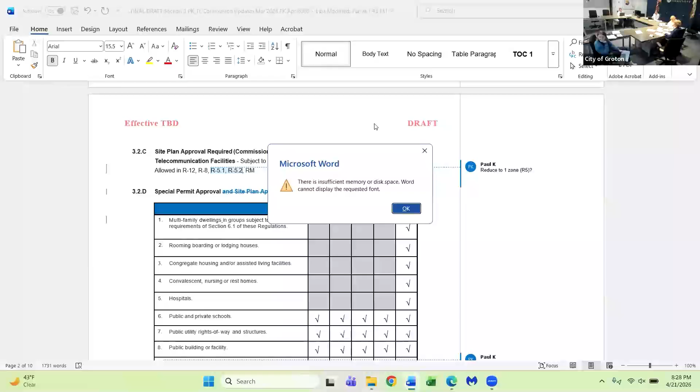Other ones. Yeah, see. All right, so.

This is section 3. This is where we left it after the last meeting. One of the questions we had, Ron, is do we need both R5.1 and R5.2? Both. You look at them, there's no difference in use or dimensional standards between the two. The idea was that we can just have R5 and be done with it. So now there's that. Seems to make sense.

Can we scroll through? There's a difference between R5.1 and R5.2 for vocational training facilities, physical and developmental disability, subject to requirements of section 6.9 of these regulations. That's in 5.2, but not 5.1.

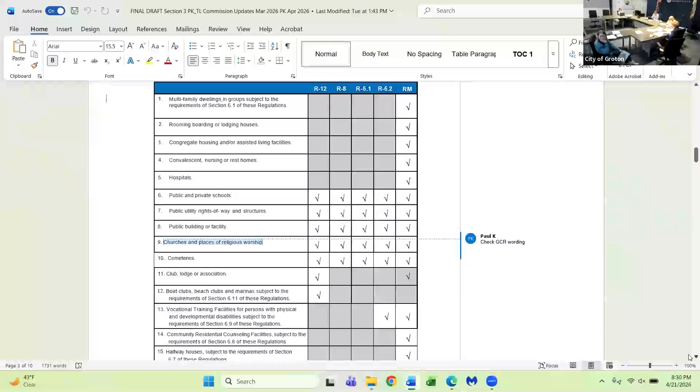Is there any particular reason? Because the dimensional standards are the same, all of them. So you have to look at the map to see where 5.1 and 5.2 are.

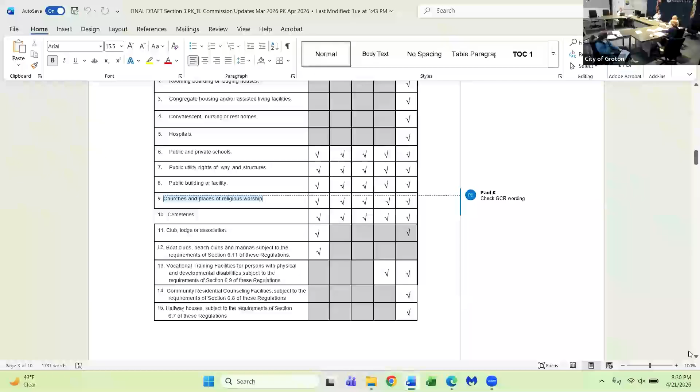We'll go back to it at the next meeting. All right, let's just move on to two. Sure, all right. Well, yeah, you're watching me.

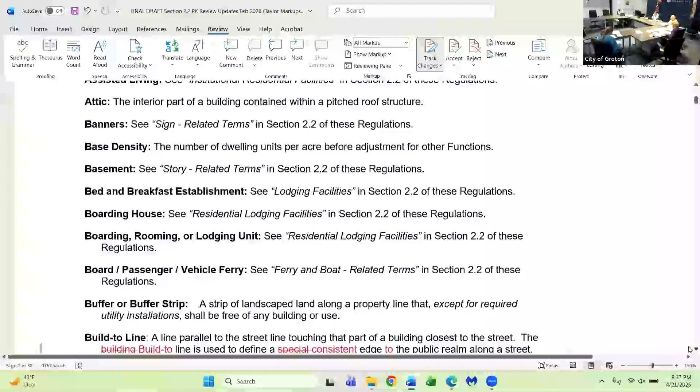Open it. Okay, this had to do with the build-to line, and then somehow in here we got the building line, Brendan, the build-to line, to define a consistent edge to the public realm. This is just wording stuff, but...

Does the revised wording make more sense than the existing? Yes. Yeah, it's fair. All right. I'm sorry, it's good, yeah, it seemed to make more sense to me.

The next one is principal versus accessory, and where we had typically stated these as principal versus accessory related terms, the wording was added just to be consistent with the way the rest of these are cited.

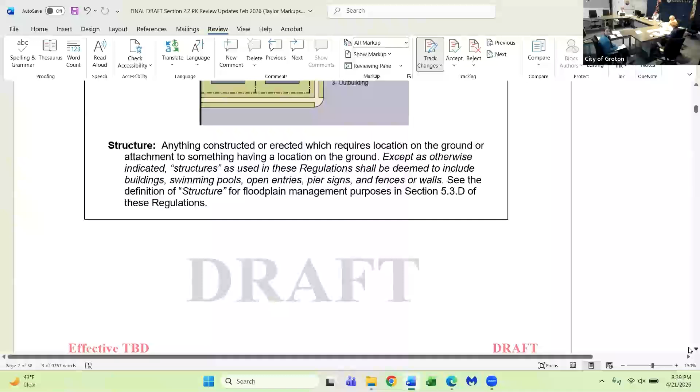Anybody has anything, or scrolling through, just tell me what word you want. So I added a commercial message because CR proposed adding some definitions that pertain to murals and artwork around the city. So definitions like commercial message, and I believe there's another one I added in for murals. Just as a written statement, I should have brought to this meeting, but that's in there just for your review.

Okay, so this is, we don't necessarily have a use, right, for a commercial message, but we have a definition if that ever comes up. Is that... any concerns with it?

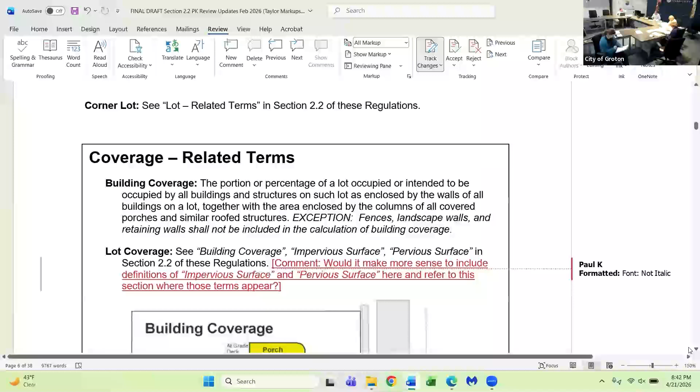Referring to this section, I don't know if... are you saying, does it exist here now? They do exist, but they're in a different place, a different location in here. Right, and what I'm suggesting, the question I'm asking, is would it make sense to put those definitions here instead of somewhere else, so that when you get to those, you could just say refer to...

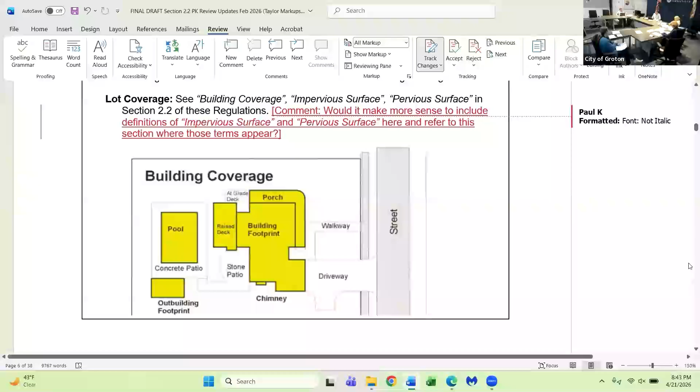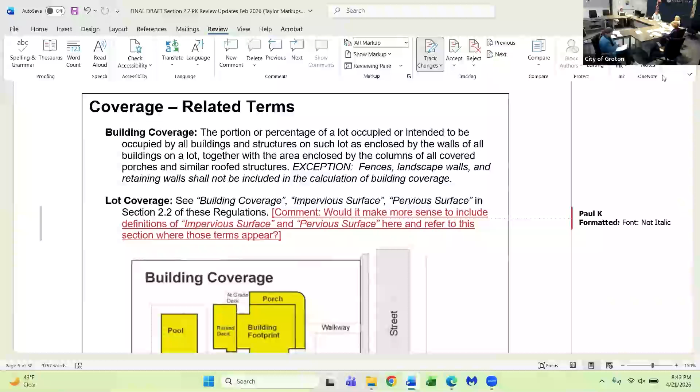Refer to coverage related terms. So does that make sense? Yeah, yeah, sure. So I'm not gonna mess with that here, I'll just make a note of it. Thank you.

So that'll be, the two of them will be in a little box. Yeah, they'll be in that box. Yeah, and then when we get down to them, we'll just refer to the box.

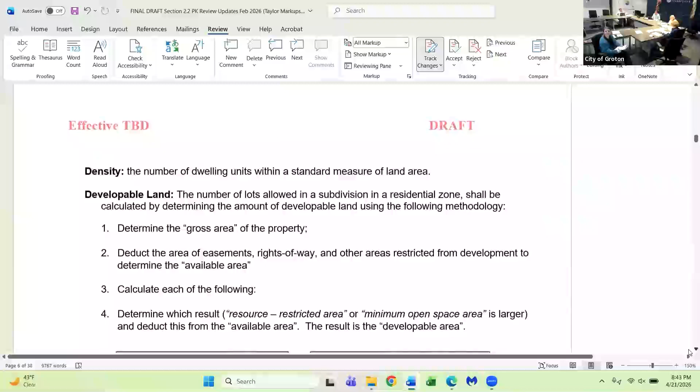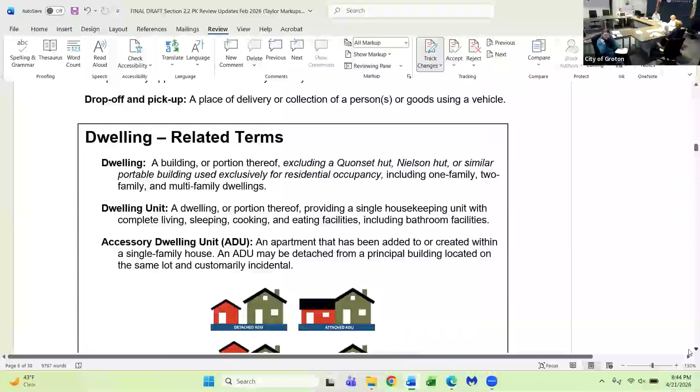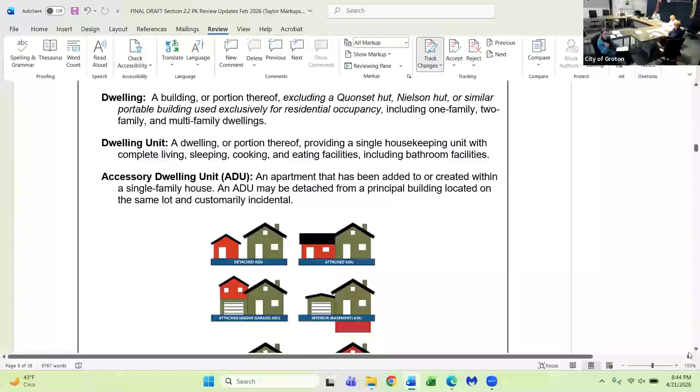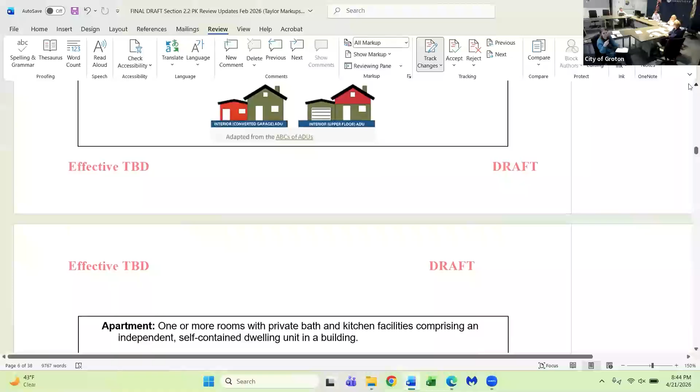So I was told by zoning that the ADU picture diagram thing, half of those don't actually meet the zoning requirements. So they said that could be potentially problematic for developers to refer to that, because there's like the basement and then there's the above attached over the garage. So Sierra and I were talking about maybe revising the picture or just eliminating it as a whole.

Are you saying that the pictures don't conform, or the definition? If the pictures don't conform, they're misleading to developers for when they go and look at these zoning regulations and see what they can do and not do. So they think they're not consistent with the description. Yeah.

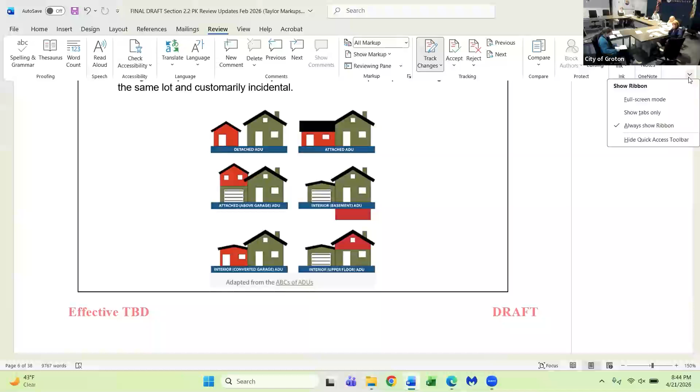Do you know which ones are wrong? The one with the above garage, the one with the basement, for sure. And then...

I also have another copy of this marked up where it has crosses on it, so bear with me. I believe that was the upper floor ADU. I'll have to double check my markups on that one, but it was that picture that they were concerned about.

So do those conditions not exist, or are they just depicted incorrectly? So it wouldn't... so this would just be depicted incorrectly in accordance with these zoning regulations. So yeah, where in the zoning regulations are they, where's the conflict?

So you can't have a basement ADU unless you have, I believe it's an egress walkout, but that's all building code. And then some of our height requirements currently don't allow for the attached above-garage ADU unless it meets the height requirements. But going over the zoning regulations, they mentioned to me that this could be misleading because you can't do three out of the six of these.

So they're saying you can't do... so this one is a code violation. Yeah, this one would be okay as long as it was within a 35-foot height limit. Correct. And the same with this one. So the ones on top, that's what it was.

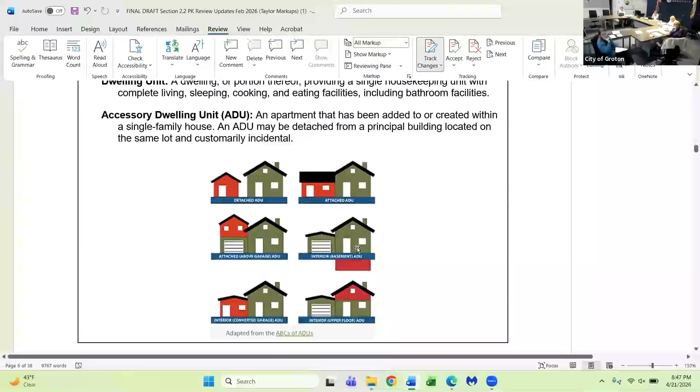So we can fix this one and this one. Yeah, right, yeah, but not this one. Yeah, okay, yeah, definitely with that one, because you see the ADUs underground. So I'm gonna... yeah, well, there's a picture, so. Yeah.

So are you talking about changing the written definition so the picture matches? No, the picture so it matches the definitions. All right, so they gotta go.

Well, it's up to you whether we can fix it or we can eliminate it. So you mean eliminate all the pictures? Or can we pick it apart? Well, I mean, it's all one picture.

I think Sierra said that there was a way for her to kind of fix it. Yeah, if Sierra can fix the picture, that's fine. We should take out anything that's gonna violate the building code.

But the problem with the other two is we have to change our definition of party. I added a party wall definition, and I also added a two-family attached definition for you guys to review. So those definitions would fix the other two problems here? Yes. Okay, cool.

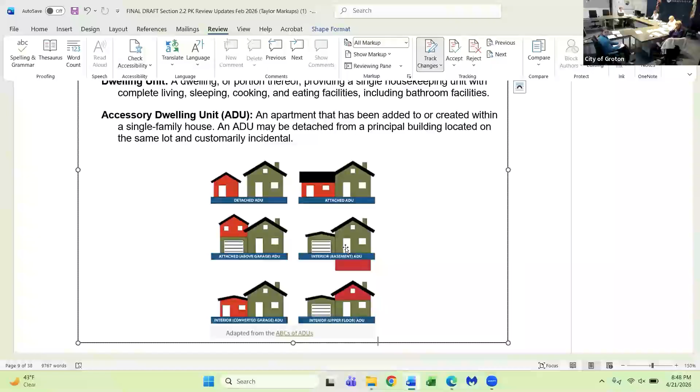All right, I say that's fine if Sierra can take out that one that's unacceptable. That's the way to go, but that's beyond my capability with the tool. Yeah, just spraying white on them. That's right, exactly. A little sticky note over it.

Yeah, it doesn't belong there. But also, okay, so remove the 'but.' We'll accept that. All right.

And that's my proposed language for the two-family. Okay, so this is the two-family, this is your definition you added? Yep, and this was taken from the same book of definitions where they get all these definitions, and the party wall definition. Okay, so we will add that.

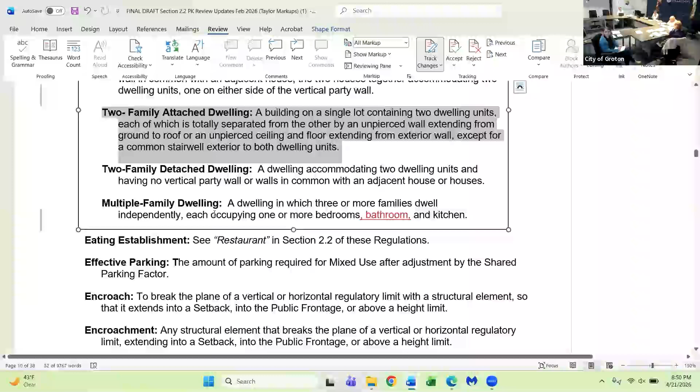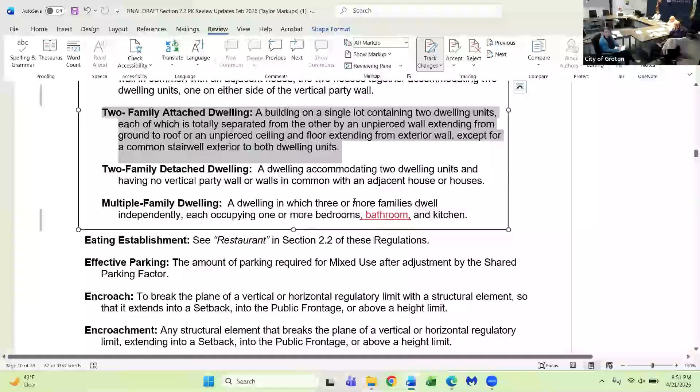Okay, so the multiple family dwelling: three or more families dwelling, each occupying one or more bedrooms, bathroom and kitchen. I added the word bathroom. Right, because it's more than bedrooms and a kitchen. We don't have common bathrooms anymore.

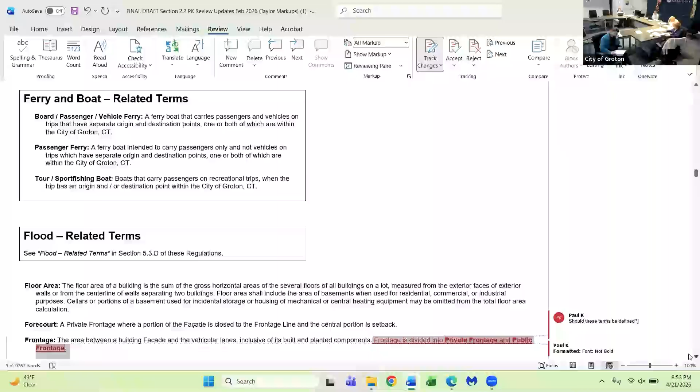Right, it's got very important main terms, it's got flood, it's got... and this frontage.

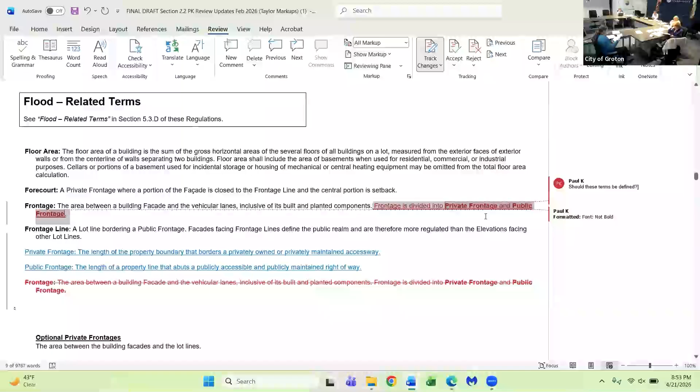We can move it up. Well, there was a reason. Well, I mean, it's... Yeah, I mean, private frontage and public frontage should be... and then you can get rid of frontages to define it.

And the frontage had been down later and then it got moved up. Moved along, not exactly.

Select... the red paragraph at the bottom can go away because that's right up above.

Right, yeah, we took out... and then just use frontage, it goes. Yeah, frontage line has to move. And these come at the... below the others.

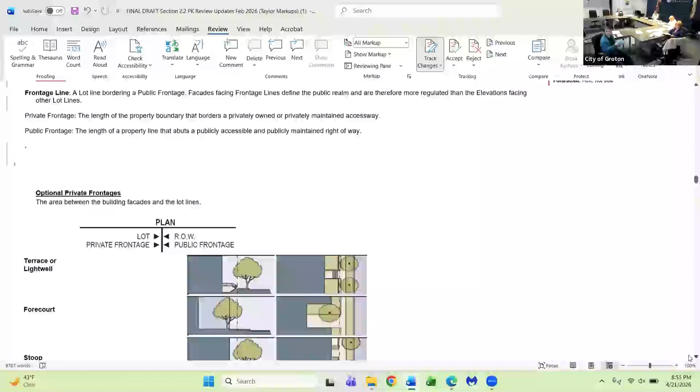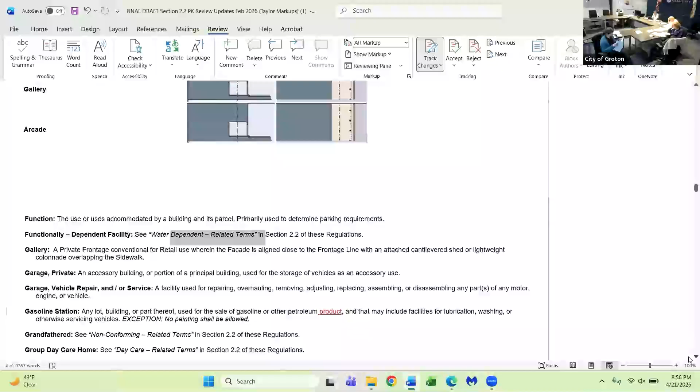Yes, on each station. So I just made those changes to kind of be more aligned. I added in gasoline stations, I added other petroleum product, I added the word product.

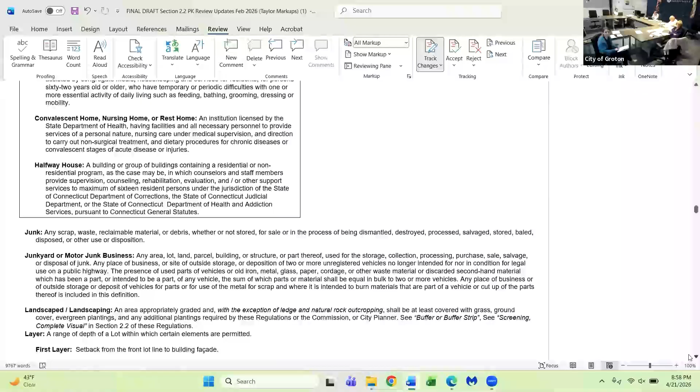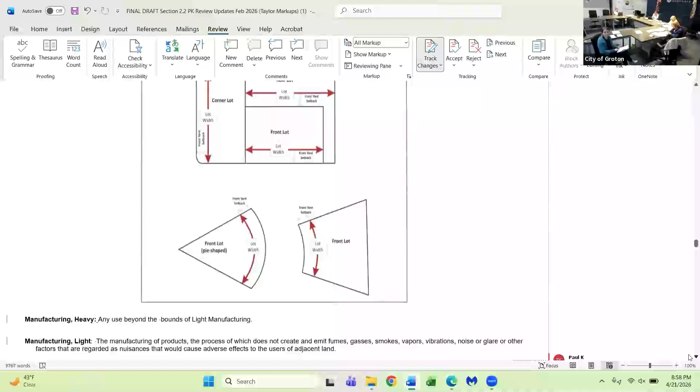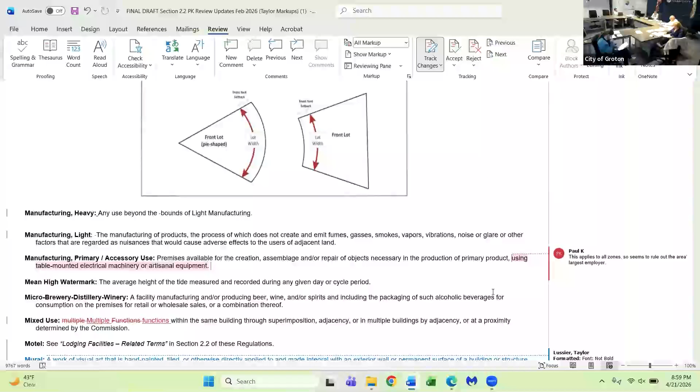So, seemed to me it, when it -- I don't see the need for that phrase anyway. Yeah, well, kind of been kind of exacting. I think we were...

At one point we were struggling with: what if somebody wanted to do some small scale manufacturing in commercial, that type of thing. And that sounds like there. Taylor, does the big book of definitions have something for manufacturing?

Big book of definitions here is now -- oh, it says no. What's that? Or it says, no, I think it's really... I think what you had to begin with is just fine. So we should take out the 'using.' Yeah, okay, yeah.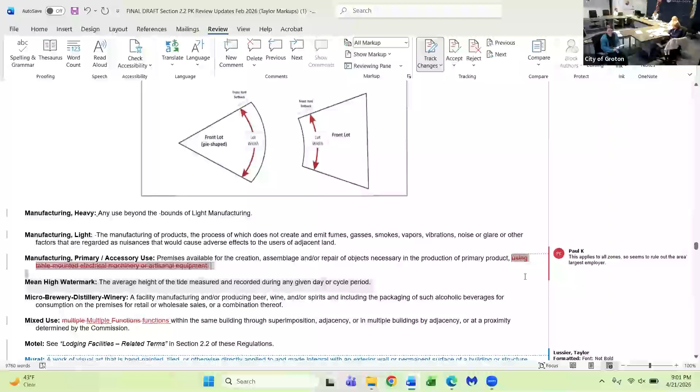Remind all of them and fix it. If we don't get anything tonight regarding what we're going to accept, when we change the things that we don't do, at the end we can just accept them all.

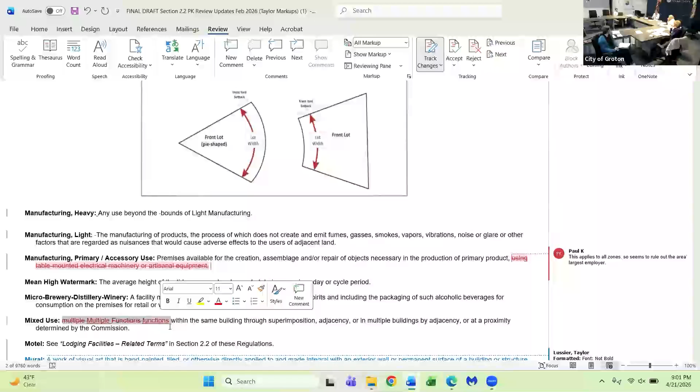I'm afraid, I don't want, if I try to keep a running list, that's my concern. I just assume if you can bear with me. I'm not sure how much further we're on now. I don't have any question about the time, I'm just trying to make it easier. I just assume if you don't mind watching these.

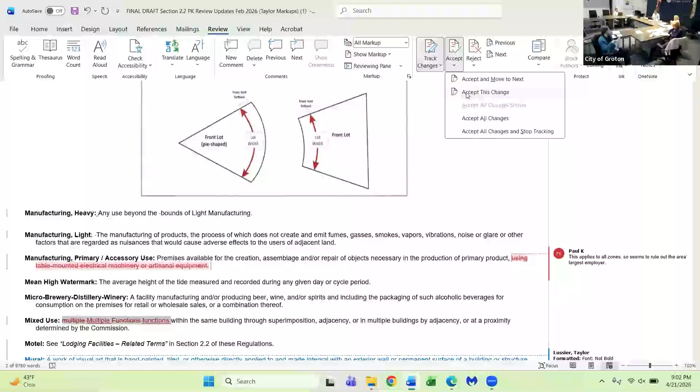This is just messing with the capital, the uppercase letter should be capitals. Turn, well, I'm more... they're mixed use, yeah.

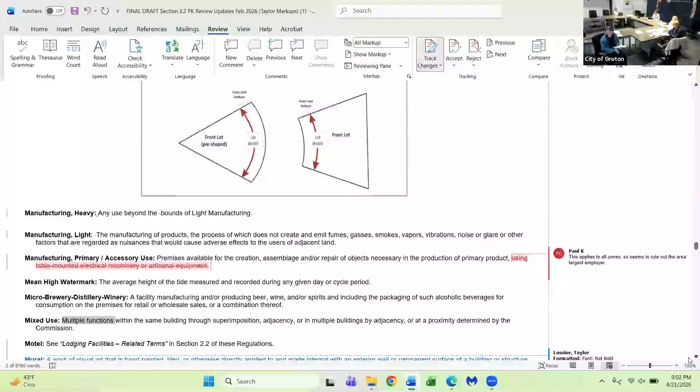Okay, mural. That was also proposed by Sierra to kind of delineate the commercial advertising part from public art, and then the mural. So this would just say this is not a commercial advertisement, it's just someone's artwork.

Do we need public art then? Well, public art is sculpture and bike racks, trash cans and utility boxes. Good points. Keep it.

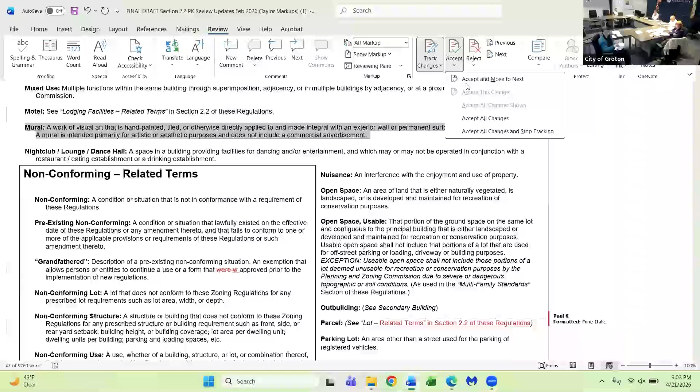Okay, got some spacing problems here. Outbuilding. Parcel, this is in lot related terms.

Needs assessment. So this is actually stolen from, was it Ledyard's definition of this? Paid by developer, analyzes existing public and private parking for use. It's basically a definition for us to point to when we get to section 6, because I did include a little section for parking needs assessment.

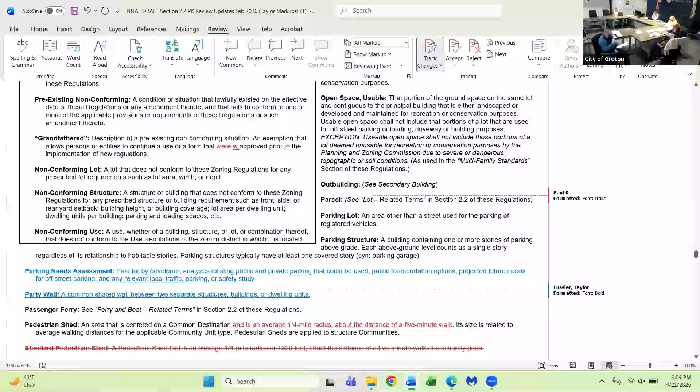Okay, we paid for by developer in the definition? Because it's paid for by the developer. It's good to have it, but you guys feel free to revise it if you want, to make it clear. And same with party wall, just a definition for us to reference.

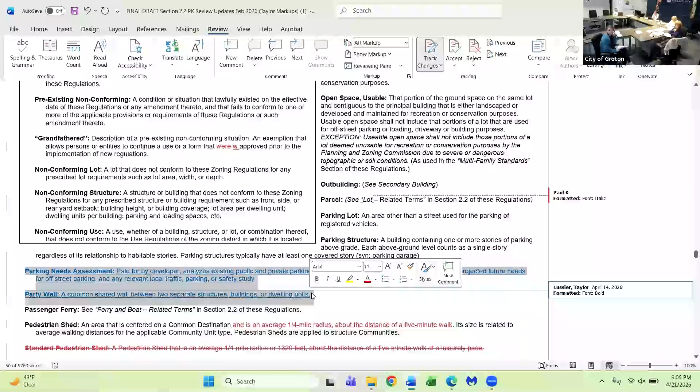Okay, so this goes for side by side and up and downs, correct? Yep, covers all the bases, that's all.

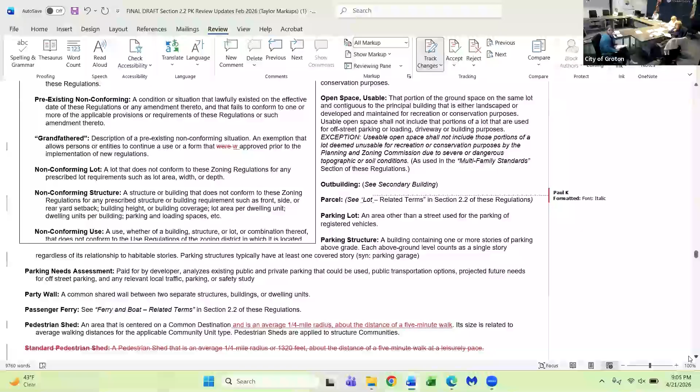Okay, pedestrian shed. We decided, this is something we talked about doing several meetings ago, about taking out the standard pedestrian shed and linear pedestrian shed, and just making a pedestrian shed definition to cover the whole thing. We talked about this, is everybody still on board with that?

I can't even visualize what a pedestrian shed is in real world terms, I don't know what this thing is. Generously, it's where people wait for buses. Oh, and there's a shed.

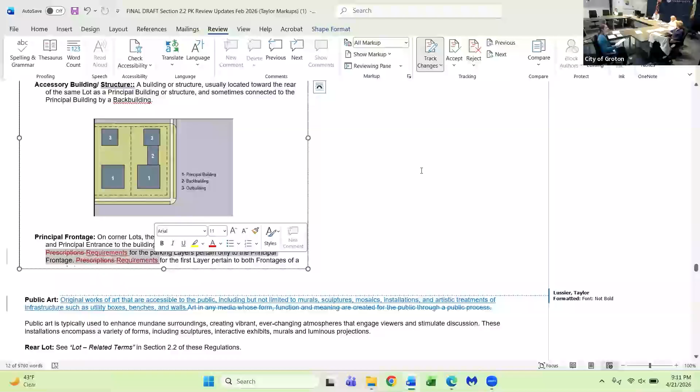Okay, I changed prescriptions to requirements. Makes sense, definitely. Prescription means something specific, like a pharmacist's prescription. Stay in your own lane, go with my language. And Sierra suggested revising the public art definition. Okay.

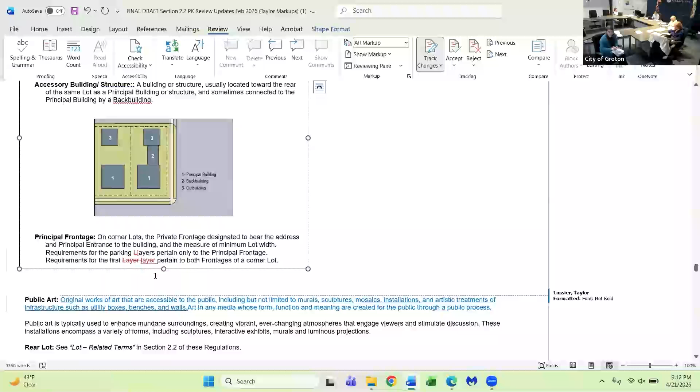There's an errant capital letter in the paragraph above, a capital L where it doesn't really belong. Layer has it in two spots. Oh, I'm talking about in the text. Yeah, right here and right here. Oh, yes, we don't need capital layer. I like Sierra's definition better for public art.

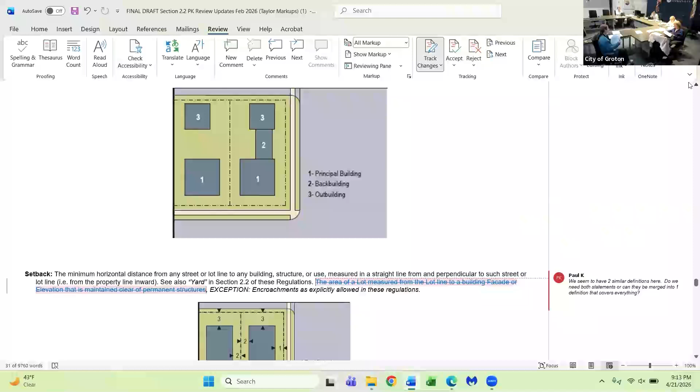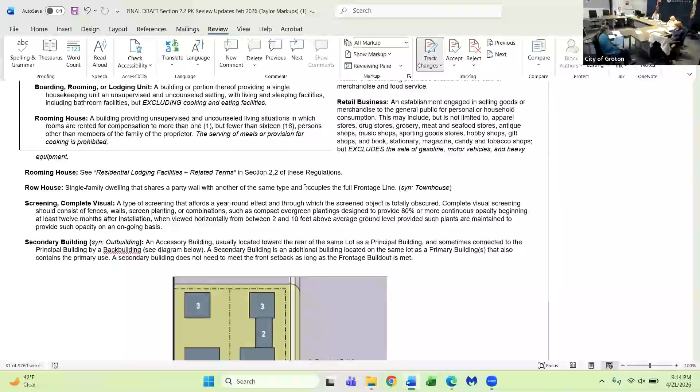You rolled past row house, which I wanted to change, sorry. But I have a useful suggestion. What's that? Row house: a single family dwelling that shares a party wall with another of the same type and shares a frontage line. That solves my problem. It's almost clearest, because the way the original writing has it, the single dwelling occupies the whole frontage line.

It shares the frontage line, that's what you think it should say? Anybody disagree? And shares a frontage line, period, end of paragraph. Shares the frontage line, right? Yeah, that's what I suggest. Okay, yep, help that.

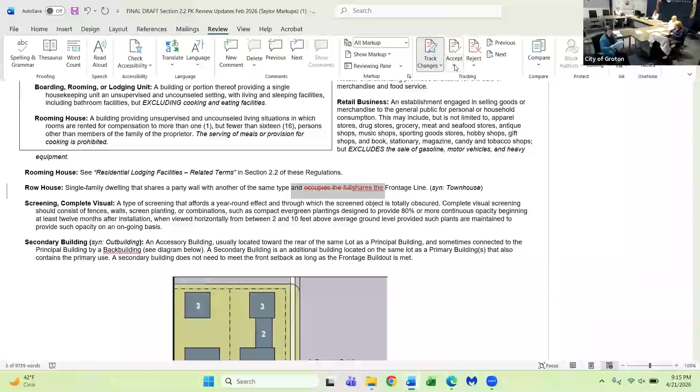We'll accept it right now. Yeah, it's excellent, thanks for taking us back there. I'm serious about that, didn't you mean it? I did mean that, I absolutely did, get it? Take a compliment when you can. That's right, that's right.

So I thought that we had two definitions of the same thing, for setback. The minimum horizontal distance from the lot line to building facade or elevation, and is maintained clear of permanent structures. Or, minimum horizontal distance from the street or any lot line to any building, structure, or use. measured in a straight line from and perpendicular to such.

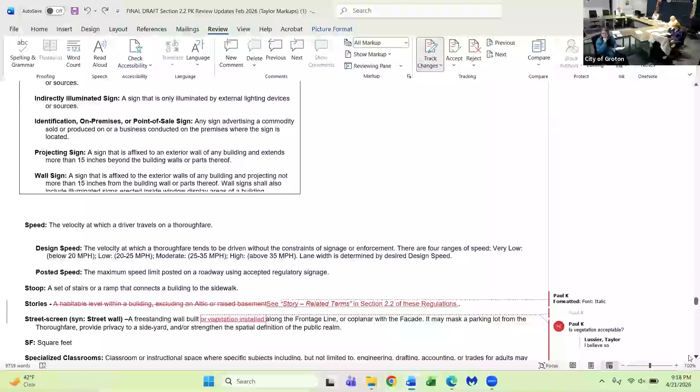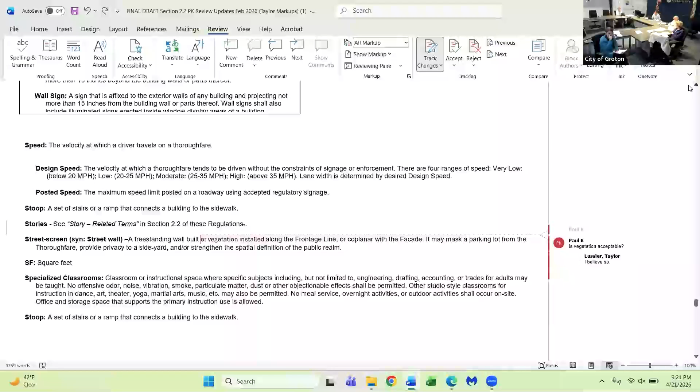But that's a formatting we haven't used anywhere else, I don't think. Well, that's what I was gonna say, is that when we pick up the work plan it's not consistent with other formats. Could I ask for just one word? Tune up. Speed: the velocity at which a driver travels on a thoroughfare. Could we change driver to vehicle? Oh yes, that makes more sense to me. Yes, that's a good catch.

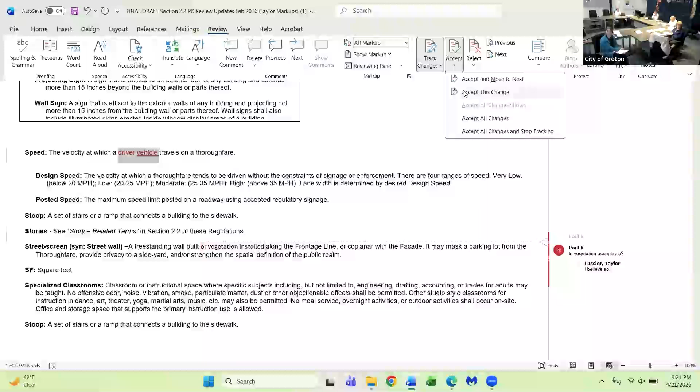Story, okay? This is why I moved a new story to here. A habitable level within the building, excluding an attic or raised basement, between any floor and the floor above. Make sense? So we'll change the description.

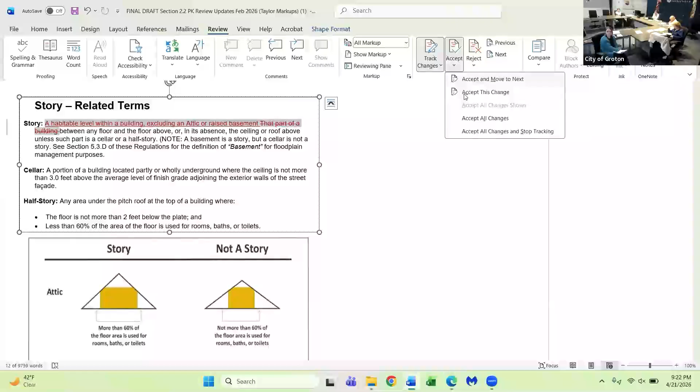It should be other things that are wrong. Probably not, but I think it's a term, so we should definitely share that at some point. There is, I saw it somewhat. Looks for a definition, which you... oh yeah, it's right here.

In this, well, there's a definition of cellar in the picture, the picture defines it, the definition of basement. So we need to both get capitalized, sorry. See here, we'll just check it. Uppercase area here.

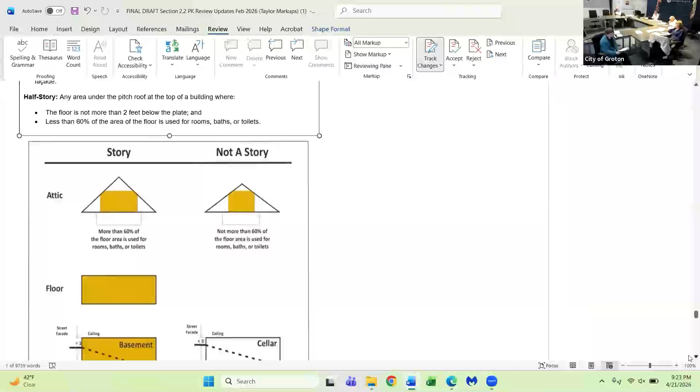Okay, so I went through and changed one, which is type of street, because up here they said 'any street,' so I just made them all say 'any street.' So they're all the same.

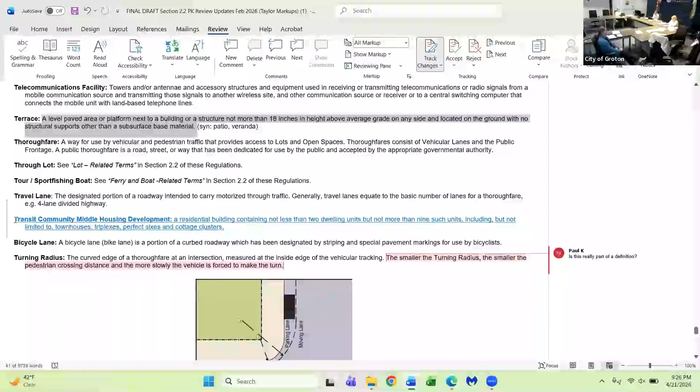Direct flight too, you're flying somewhere tomorrow? Yeah, to the villages in Florida, my grandparents are there. I can top that, tomorrow I'm flying to Portugal. Yeah, that sounds better, I'd rather go to Portugal.

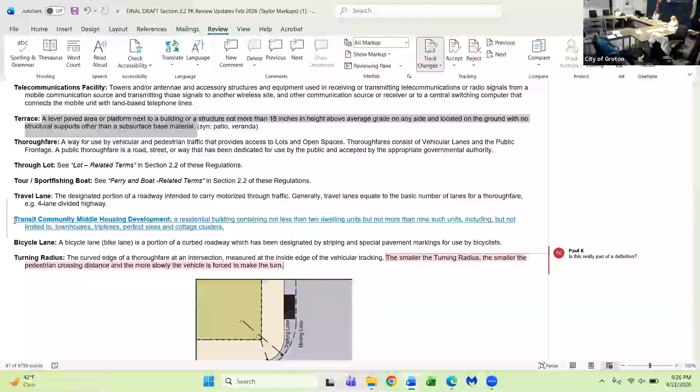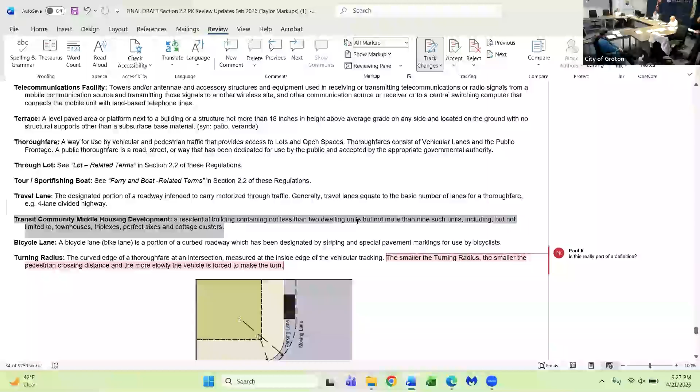All right, turning radius. I guess the second statement didn't really seem to me to be part of that definition of a turning radius, but I could be wrong. The smaller the turning radius, the smaller the pedestrian crossing distance, and the more slowly the vehicle is forced to make the turn. It's flat.

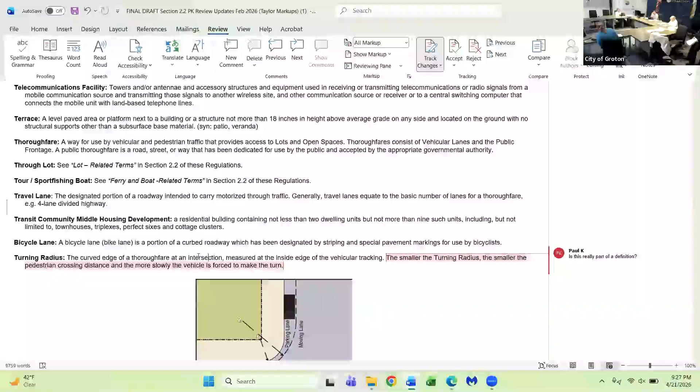Leave it, take it, what? I don't know, take it out. And they believe this is great. Disagree.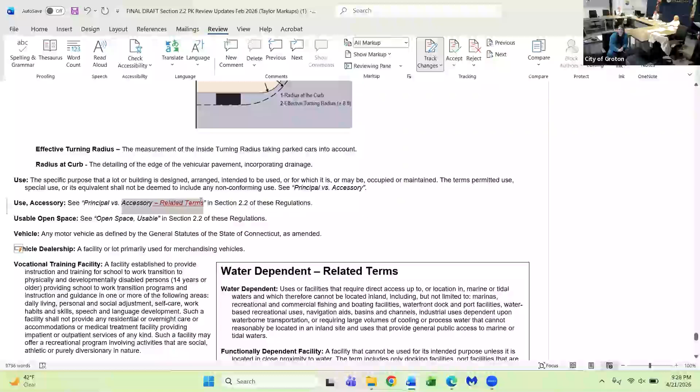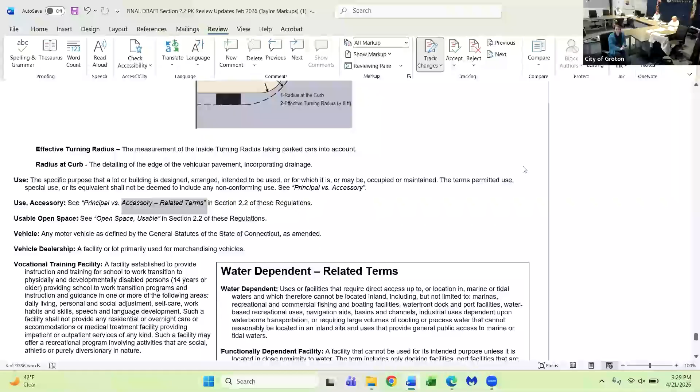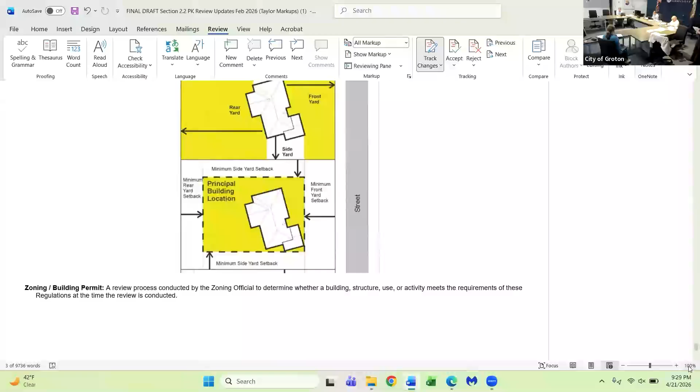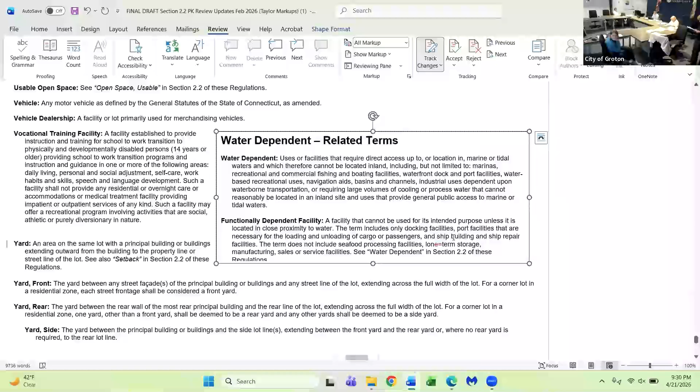Could we back up to water dependent, please? There's a little correction, unless it's already been done. Yeah, under functionally dependent facility, look at the next to last sentence. The term does not include seafood processing facilities, and then it should be long-term storage. Does that say long term? Yeah, it says 'lone term.' I'm sure it's long term. Yeah, right.